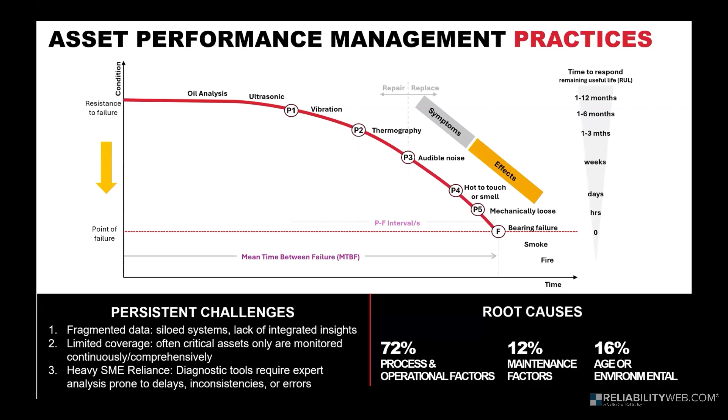One of the biggest blind spots in reliability programs that we are seeing while talking to customers is operational upset. They are often deemed silent killers, which are not visible in vibration data right away in the initial stages, but over time they can cause significant damage. Not all changes show up immediately in the vibration or performance data. For example, a pump may be experiencing a sudden thermal shock or flow surge, which may look normal in the short term, but in future it can cause significant damage.

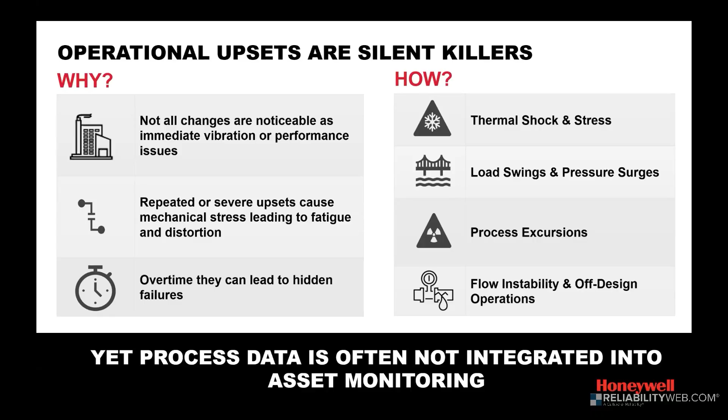So the key takeaway here is that by the time vibration amplitude rises this much, it's already too late to prevent a trip. The compressor went down for 20 hours, costing $72K in maintenance plus lost production. So the lesson is that vibration in itself is a lagging indicator. We need to integrate that with process and performance data and parameters like temperature and flow to detect early, say, fouling trends in this case before they show up as a vibration problem.

Now I'll hand it off to Sundaram to talk about how we can properly detect such issues and improve our reliability program.

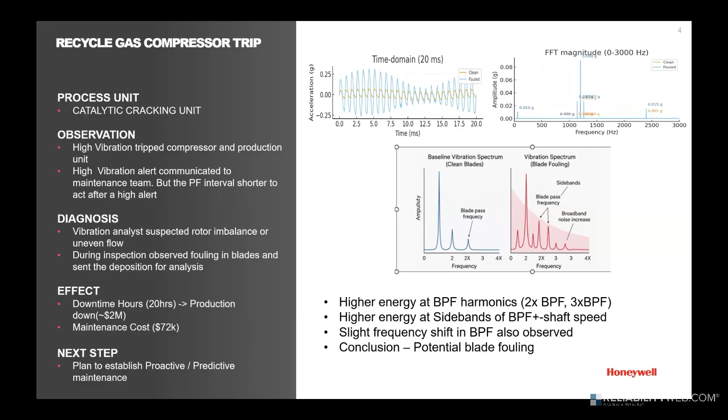Yeah, before we get into the solution, how do we as engineers in the plant really solve this problem, right? As long as your solutions are well aligned with the fundamentals and the learnings that happened over a period in the plant, the solution is going to be much more robust. So we always start with a business target. That could be maintenance cost reduction, making sure production is running as planned, making sure no safety incidents are happening, and no degradation and energy loss is happening.

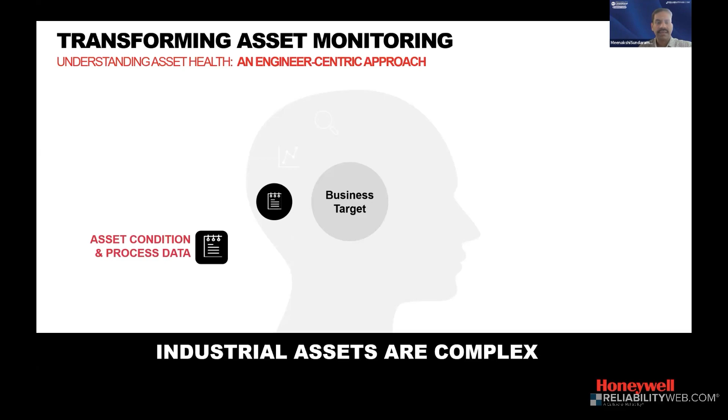Different personnel will have different targets in mind, and the first thing they do is really try to get the data that is relevant to assess where they are in meeting the business target. That's the first step. Now we need to get the data. Today, often we have a silo system. We really need a platform where we can get data from different sources, be it asset condition data from the lube oil system, a vibration monitoring system, or the DCS. We should be able to get data from multiple sources, and that's what people do by going to the different tools and analyzing the trend.

Now, the first thing you do is a more univariate approach. You look at your temperatures, your pressures, the vibrations, what the overall vibration trend looks like, and then decide whether you want to do a detailed analysis. So the first step is normally a univariate analysis to understand whether there is any statistical change in the trend of the data. That will indicate an issue which I need to deep dive into and understand what the problem could be and what action I need to take.

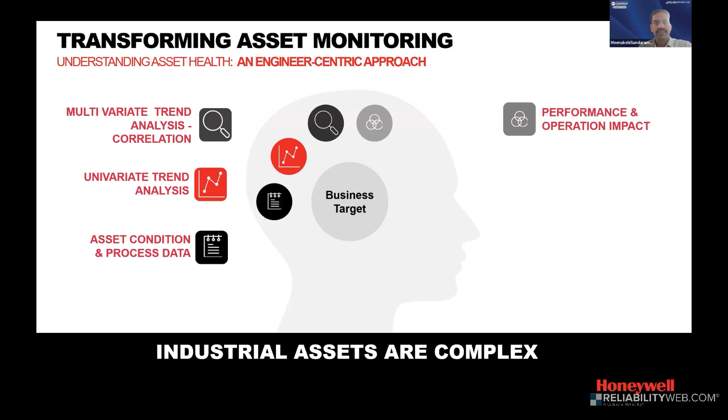So then I normally do a multivariate analysis, combining the different trends. I look at multiple trends, see how the correlations have changed, create a hypothesis, and then go and check in the field what is happening. Then I come up with an assessment of how it is impacting performance and operation. So I've taken the data, done the analysis, have a hypothesis, and I'm checking the impact of these deviations on performance and operation.

And then I look at the reliability impact, because these assets are often getting restarted, or the downtime is increasing. I can see some of the assets are becoming bad actors. I need to look at how it is impacting the overall reliability of my production unit. And then finally, you create a set of actions to execute in the field.

So this is what I was doing as an engineer in the field when I was working in some of the refineries. And then what we really need is you need to connect this, and this I do on every situation or on a daily basis on some critical assets, which is now very difficult to scale because I can hardly look at a few assets in a day.

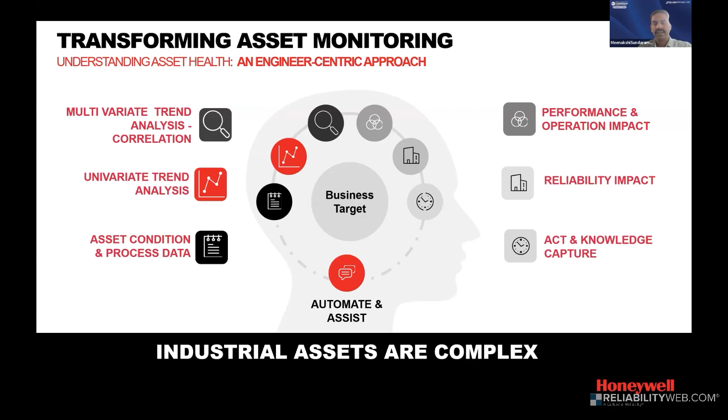What we really need is an automation of this analysis at scale, and with an assist, if it can be provided, then what I'm doing today is fully automated. All the knowledge I have should be fully automated into the system, and systems should start assisting me, right? And I don't believe in doing a black box one model, having a big AI model which is taking all the data and giving a prediction. Rather, I want to replicate all the analysis I'm doing within the AI platform. Right?

So the way the solution was built out is basically going back to the thought process of how the problem is analyzed in the field and actions are taken. The same is replicated at scale in the platform. So we connect to multiple data sources. The more the data sources, the more you're going to accelerate the ROI, because the more siloed you are, you're going to have a limited ROI on the implementation, right? So we should be able to integrate vibration data, the field inspection data, as well as the process data and the controls data. All of these data should be integrated and contextualized first to start the processing in real time.

And the next is whatever I do on the univariate trend analysis, I want to be happening in real time on all the sensor data that is flowing into the system, right? And that is really observing for, is there any shift? What does the trend look like? Is the average of last week compared to the current value shifted significantly? Then there is an anomaly that started happening, right? So I need to alert the user.

So basically, I need to be observing all the available signals in real time and start recording the various anomalies I'm observing. That may not require immediate action, but I need to start recording all the anomalies that are happening, including, for example, if an asset is stopped, I should be able to record an event so that the engineer can come and assign whether it is an unplanned stoppage or a planned stoppage. If it is unplanned, what is the reason for that unplanned stoppage, right? And what is the cost implication of that? So all that would be possible only when we start recording all the events on the incoming data.

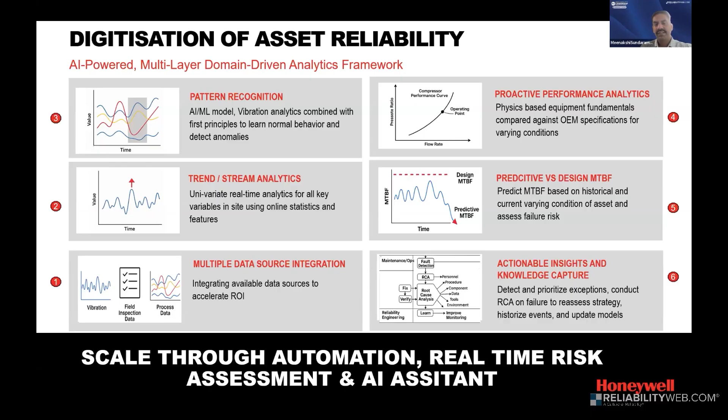Let's go back to the case study Kushagra was presenting on the process unit. Basically, it happened on the hydrotreating unit, where fouling was often happening, and planned and unplanned shutdowns were happening. Right. So we really want to have a solution which will arrest or minimize the downtime.

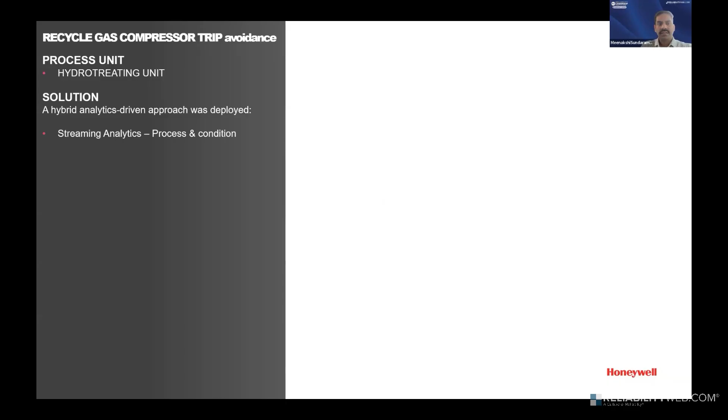So as I told you, the first step is doing the streaming analytics on the process and condition data. So it looks at the suction temperature, it looks at the ammonia in the inlet stream, because if there is an increase in ammonia and a decrease in the temperature, this combination is going to lead to the formation of salts on the compressor shaft or blades. So we need to prevent it. In addition, I also look at all my vibration overall signals and features, looking for anomalies at the signal level. So that's a first level analysis that happens in real time.

So thousands, 10,000s or 100,000s of data points will come in real time when you are going from site to enterprise, and the platform should be able to handle this in real time, because some of the deviations will not sustain. For example, suction temperature may deviate for a few minutes or even a few seconds, right? So that also matters. All the abnormal fluctuations should be captured as an event, which will help in doing further root cause analysis later, right?

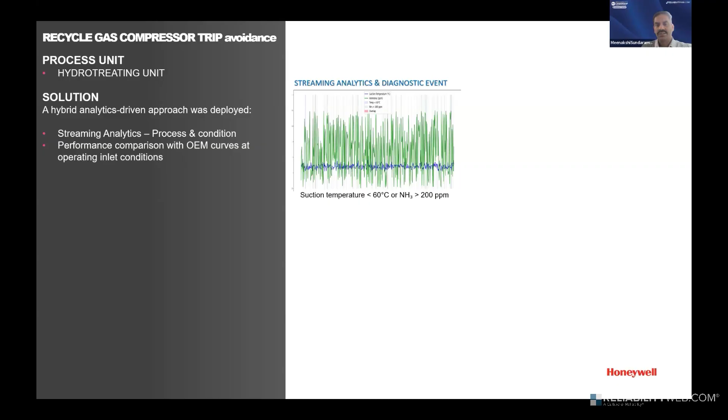When a specific potential failure mode is identified, then you can drill back down and see what are the associated symptoms, and these could be one of the symptoms that will be raised, right?

The second step, as I was telling, we will digitize the performance curve, make it independent of the inlet condition, and start looking at the current operating point versus the expected operating point from the OEM curves. And the delta will actually indicate an increase in fouling. That could be one of the reasons the performance can also degrade. So I need to see a trend of this degradation or deviation. So I will trend the deviation and generate an independent event on the performance deviation.

And we have configured this in the plant, and we were able to get a performance alert on 22nd November, right? So next, we went ahead and deployed the predictive analytics model. The performance model is the first principle digital twin model, and the predictive model is more of a data-driven digital twin model, which will be predicting what the normal condition or the outlet condition should be, right? And then compare against the actual.

So based on that, we can see the onset of early alert at 35 microns, whereas your DCS limit is 75 microns. So you have enough margin or the time to act before it leads to a failure, right? And you also know how much is the energy loss because of the fouling and the performance degradation, because you have an accurate performance prediction model. So you'll be able to accumulate what is the cost of energy losses in the asset, right?

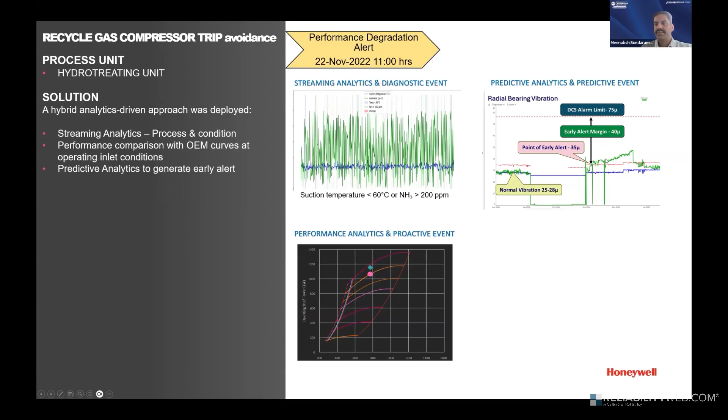After some time, it becomes very obvious for the engineer to understand there is a problem happening. But to detect much early is a challenge, right? Because you are going to generate an event at the onset of the deviation. So that's where you need to have a very sensitive, accurate model to really predict this event. The more the number of events, then it becomes noisy also. So you need to have enough controls so that this event is really not noisy and it's also actionable.

Now to make it more actionable, it first generates a rotor anomaly, and that particular event is basically generated based on your asset strategy. So we look at first the asset strategy, and we have a template built for each of the asset types. And in that, you can see the rules are defined to integrate the output of these three, right? So it looks at the events coming from the streaming analytics. It looks at the events coming from the performance analytics as well as the predictive.

So all these events are taken, and the data is taken from these monitoring into the decision system, where you look at the combination of: the polytropic efficiency residual is becoming higher, right? Which means the deviation between expected and actual is becoming higher. And then you're also observing the radial vibration overall on X and Y are increasing, right? That means the deviation from normality is increasing. And you are also seeing the compressor frequencies and the amplitudes are also increased. So now this is what is leading to a rotor anomaly alert.

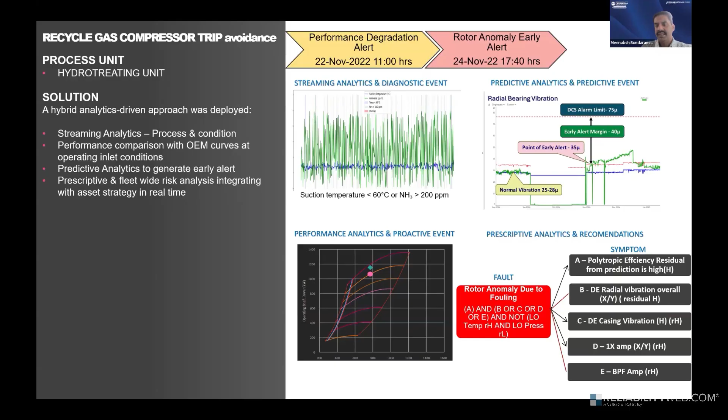Before it generates a rotor anomaly alert, I also want to check what is the condition of the lube oil system, because sometimes the lack of lube oil pressure and temperature could be an issue which is leading to this vibration increase. So we need to eliminate it. So you need to have a combination of triggers. You also need to have a combination of rules to eliminate the possibility of other failure modes, right, or other symptoms which are leading to this failure mode, right?

So by doing all of these, now there is a water wash already in place, but they need to increase the water wash temporarily, and then see the vibration is getting normalized. So then you can see that the rotor anomaly alert got normalized after the water wash is increased. Now the lesson learned on this one is, if proactive and predictive alerts are generated, then I'll be able to act much earlier, almost a month earlier than the actual vibration it is leading to, right?

And the impact is we're able to reduce or prevent the downtime and the production loss because of those downtimes. And you can reduce the maintenance cost, because if it is allowed to foul, you know what will happen, right? You have to overhaul it, clean it and put it back. So you need to have a downtime for it. And by doing this proactive monitoring, you're also avoiding the secondary damage, which means you are also extending the asset or component life. So that's another benefit you're getting by acting early on the system.

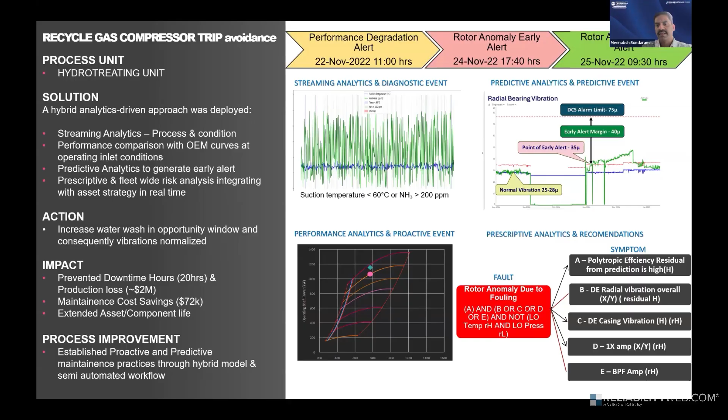So overall, the outcome is proactive and predictive maintenance practices were established, and collaboration between process, operation, and maintenance is being established. It's going to take time, but at least it is initiated, and awareness on this application across all three teams was provided, and they started getting familiarized with the system. Right.

So the key takeaway is we need to go beyond the point solution if you want to be effective in terms of reducing the cost of lower reliability, right? Reliability is often looked at from one dimension, which is basically maintenance, asset condition, vibration. No, reliability you need to look at from a holistic, all three dimensions. You need to look at it from operation-driven reliability, process-driven reliability, and make them accountable, right? We need to really make all three people accountable for reliability. It is not just the maintenance team, right?

By making operations accountable on the various upsets, because I'm having streaming analytics where I'm recording all the abnormality on the various signals, right? And I'm able to identify how many events are related to the process and operation, and I can collaborate with the operations team to prevent going outside of the operating envelope. There may be challenges, but giving visibility to the operation team that this violation of the operating envelope is leading to this particular asset failure or potential asset failure will actually help. If not immediate action, there will be awareness and consciousness of how to make sure it's operating within the operating envelope, right?